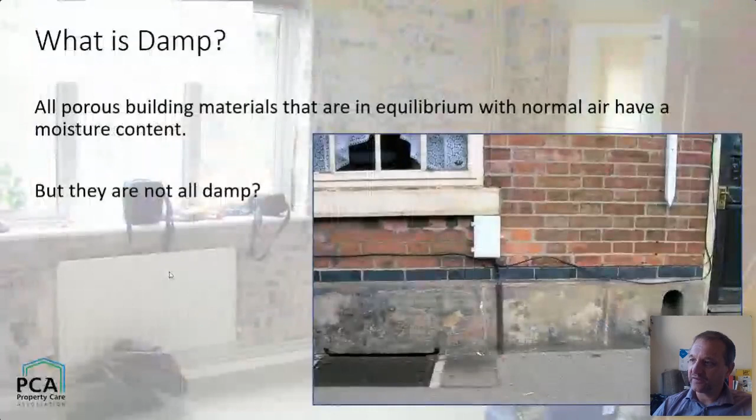So this is not really a presentation about remediation and about remedies. It's much more about how we think of damp and how we recognize it and how we diagnose it. And it's not going to be a step-by-step guide to how to use a moisture meter either. It's going to be a conversation really about dampness and the more broad thoughts around how we manage it. So let's start.

The other thing I've got is a few slides today that don't make me particularly proud. And this is the first one. This is a house in Derby, near where I used to work at the British Pest Control Association. You can see a beautiful slab with a blue brick damp proof course. It's probably a remedial one. And then if you look very carefully, you'll see damp proofing holes above it. And you'll notice that that's about 2.5 foot up from the internal timber floor level. You know it's got a timber floor because there's a cellar underneath it.

These are the things that do not make us proud. And as a responsible preservation industry that's built on skill, built on knowledge, these are the things that have given us a bad reputation, and the sorts of things that we're working very hard to put right. So not stuff we condone.

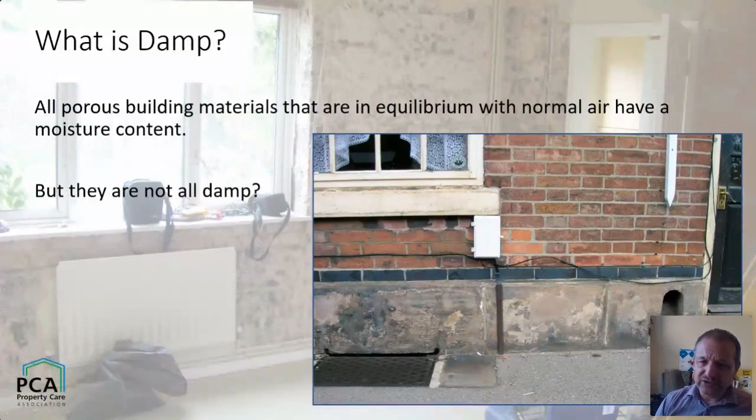So what is damp? Well, all solid construction materials have a moisture content. Some plastics probably don't, but most porous materials gathered from nature and reformed as construction materials, whether it's timber, bricks, even concrete, have a moisture content, and it will be in equilibrium with the moisture in the air and with its environment. So everything has a moisture content, but it's not all damp. So how do we distinguish what's damp? Well, I'm going to read a few bits off slides. I don't do that very often, but solid build materials are only damp when there is an excess of unbonded or free water.

So if you get moisture that enters the building through various sources, we'll look at some of those in a minute, it's only when that water can move around in the structure, when it becomes either a transport mechanism for other things inside the wall. It affects the thermal performance because the air is displaced by water, and the water conducts energy far more efficiently than the air, or when it can act as a medium for the breakdown of stuff.

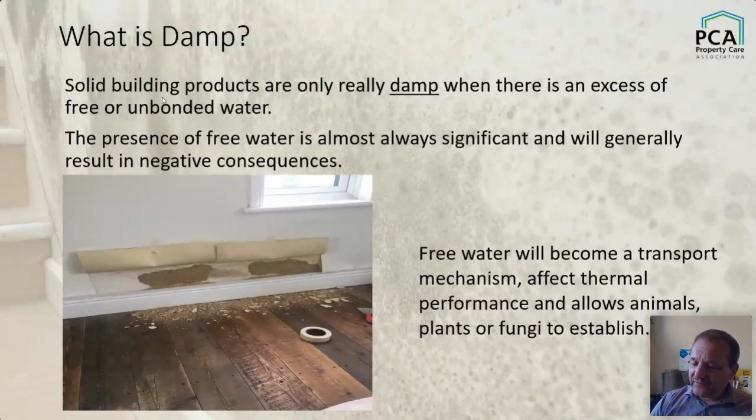So it's where animals and plants and fungi can start to use it to break down materials. They use it, moisture contents go up, and they can eat it essentially. So it's the free water, it's the excess water that is problematic. And so what are the consequences of free or excessive water? Well, we know that timber in contact with damp masonry is susceptible to decay. It absorbs water from the environment, it transfers into the timber, and it rots.

Now, insect infestation. So the photograph shows you a joist. It has decay, it has some wet rot in it. The wall plate has some wet rot in it, but there's also some woodworm, some Anobium in it. And the anobiids need an elevated moisture content to get going. And it allows insects to munch through the sapwood of that piece of pine. It'll also allow mold growth. We talked about the reduction in thermal performance.

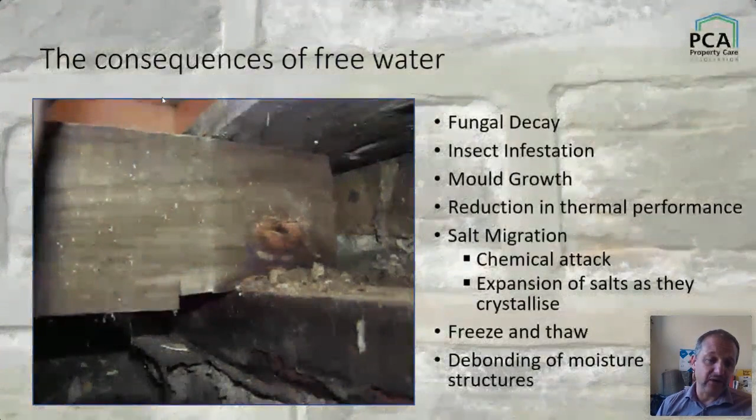The free water will also act as a mechanism to transport salts, and that can break down both timber and masonry structures through a process of chemical attack, but also through the expansion of the salt crystals as they turn from a liquid into a solid, breaking down the surface of the stone. If you can see just in the backwash of this slide, there's a piece of sandstone wall with salts appearing at the surface, in part because it was pointed with sand cement when the wall was very wet, and the salts are now coming out through the stonework.

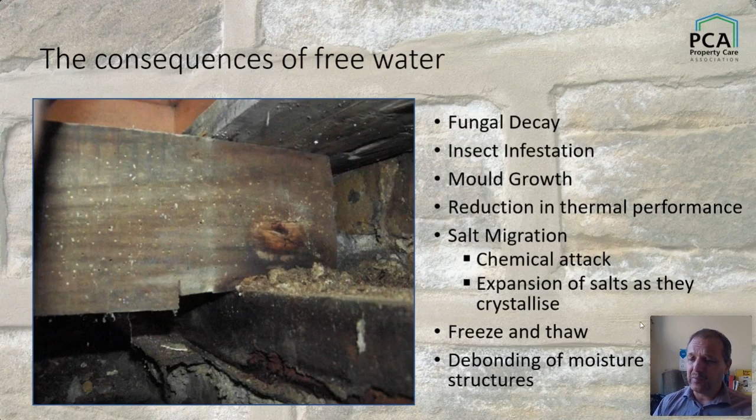High moisture contents in masonry structures also cause freeze thaw in cold climates in the winter, and that's something we're seeing a little bit more of recently as we started to apply insulation to the inside of buildings. It's making the walls colder, and it's causing more freeze thaw problems on buildings where they've had internal wall insulation. One of those odd, unexpected consequences. And we also see, when things get wet, the debonding of structures. So plywoods come apart and other things start to break down.

So where does this water come from? And this is where we make moisture diagnostics really simple. It's very route one, this presentation. It's either water that's outside the building that wants to get through the envelope and get in. So essentially rainwater. Water that has originated from the sky, falls onto the roof, hits the walls, goes into the ground, goes into the drainage system or into the soil, and hopefully drains away. Well, unfortunately, if we build boxes and put them into this damp soil under these wet skies, at some point, if we're not very careful, water tries to get in. And that water, we know, causes problems.

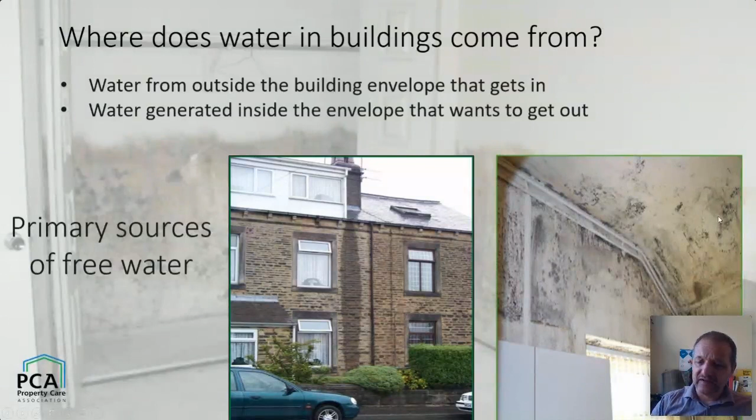The other source of water is the water that's generated inside the building, that essentially wants to get back out again. And the main issue here, and there are a couple of others, we'll look at them in a moment, is atmospheric moisture caused by occupation. So where does the water come from? So these are some of the common defects that we see that are the instigators of lots of issues.

So you've got drainage issues, you've got rainwater goods issues, you've got roof leaks, flooding is something that is big in the news at the moment. All these things cause water to get into the structure and get into the masonry walls where it's held, where it can then move around, where it can cause problems.

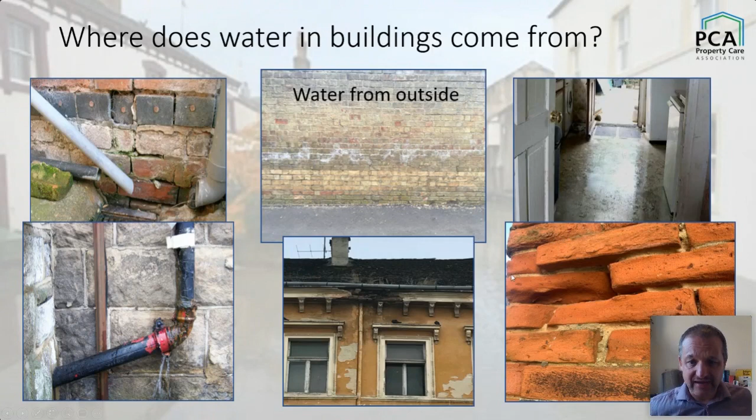Bottom right is a photograph that I took quite recently out on the East Coast. There is a bit of sand and cement pointing on around the corner, but actually most of that isn't caused by poor maintenance. It's actually as a result of really, really exposed conditions and poor selection of building materials by the original builders.

So water from inside, and how does that manifest itself? Well, plumbing leaks are common. They can often go unresolved for a very long time and cause massive problems. We see huge dry rot issues and wet rot issues caused with plumbing leaks. We of course see lots of debonding and damage to finishes as a result of plumbing leaks.

It's often in new buildings where water has been built into the structure and takes a long time for it to come out. And usually for the first 12 to 18 months, if the building hasn't been dried down properly, and particularly when the occupants are moved in quickly after the construction phase is complete, you get a lot of water inside the building that then wants to get out, and it manifests itself in condensation in all sorts of horrible places.

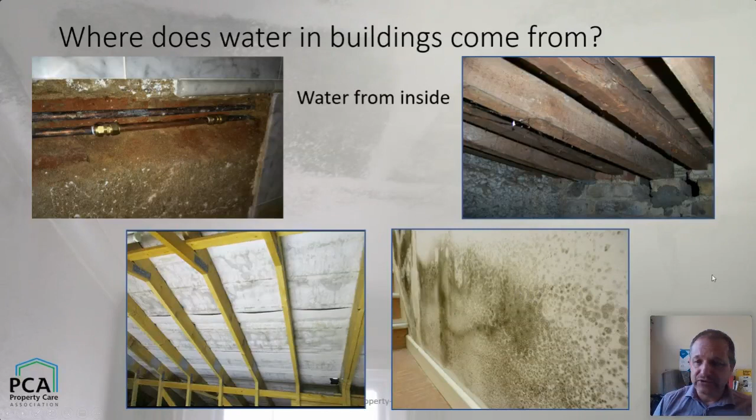And the bottom right hand photograph is a great picture of mold growth; it's basically as a result of internal moisture imbalances. And we're going to talk about internal moisture imbalances a little bit more as we go on.

So a few years ago, we were looking to start a debate with a number of people around getting a research project going. And I was challenged by a guy called Neil May, who unfortunately died a couple of years ago, who founded the UK Centre for Moisture in Buildings. He said, well, why don't you actually think about understanding what is an acceptable level of moisture in buildings?

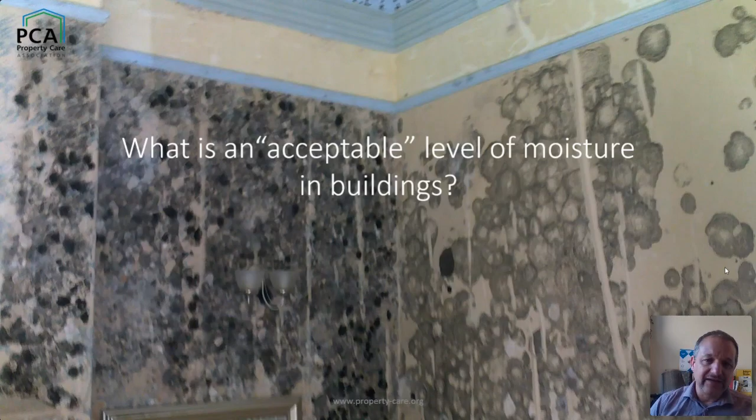There's lots of debate about how moisture is diagnosed, how moisture is then dealt with. The term breathability is one that makes my hair curl and doesn't really mean anything. But there's lots of conversations about these things where people are in disagreement. So why don't you actually concentrate on a project where you understand and define what an acceptable level of moisture is? And so the next few slides are really some of the thoughts that have come from that journey of thought and discovery.

That project converted into a 2.5 year knowledge transfer partnership with University College London, and that has resulted in some quite interesting findings, which I'll pick up on later in this presentation.

So, if there's sufficient water to cause any of these things, so mold growth, conditions for insects, deterioration of finishes, liquid water on the surface, staining, salt damage, timber decay, distorted timbers, all the collapse of structures. By collapse, I don't mean catastrophic collapse every time. I mean things like fiber boards, plaster boards that actually disintegrate because the moisture contents are so high.

All of those things actually define a damp problem. If they are there, there is free water and there is most certainly an issue. If there wasn't, the building would be in equilibrium, these things wouldn't break down. The other thing that's really important, I put it at the bottom, is that dampness makes people fed up.

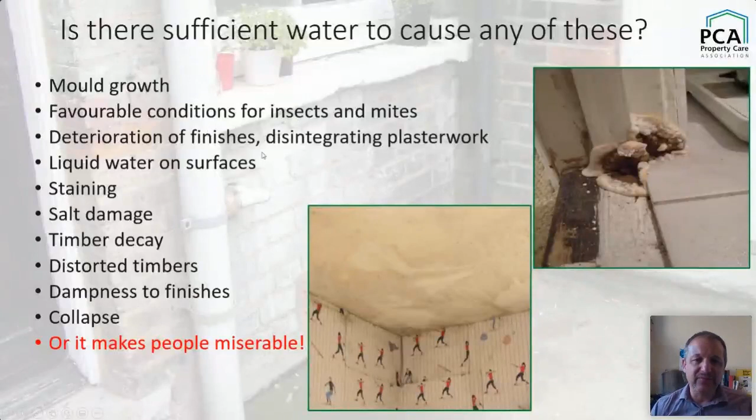It's unpleasant. You don't want it in your house. So if you have distorted or falling off plaster, if you have issues of that nature in the house that you're looking after, that you're the custodian of, that is your pride and joy, that's your biggest investment, and you have something that looks damp, then you don't want it. It makes you unhappy. There's also some suggestions, of course, that it can make you ill too.

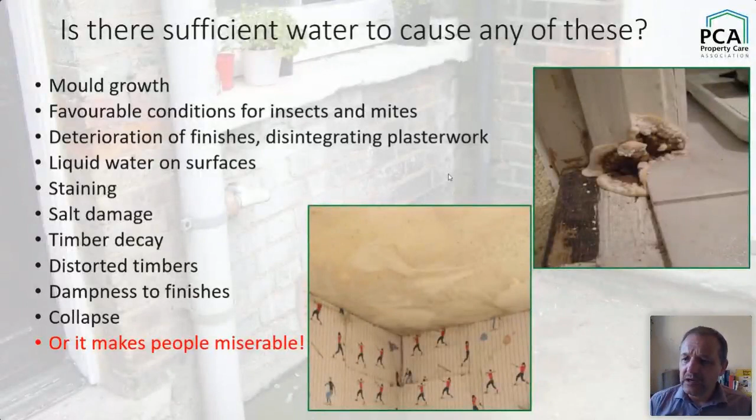And there is a debate about whether the biggest issue is about your mental health and how it makes you feel and how it depresses one, or whether it's actually the effects on your physiology from the dampness itself. We're used to living in relatively damp climates, but actually living in a damp house is just miserable.

So let's move on. So let's think now from a scientific point of view, rather than the visual point of view, what the issues are, or where the critical thresholds for moisture issues might be. And here are three gentlemen that have influenced me over the years. Graham Coleman, a friend and mentor. Chris Coggins, bottom left, who was my ex-boss, but a mycologist and somebody that knew more about dry rot than anybody I've ever met. Brian Ridout, who basically knows a great deal about lots of stuff and has written lots of books. But some of these are taken from their quotes.

Moisture contents of less than 20% provide what is described as immunity from fungal decay. I wouldn't say they were completely immune, but generally timber below 20% moisture content is kind of safe. It won't rot. However, you need to get it below 15% to stop anobiids. Anobiids are woodworms and death watch beetles and the common forms of wood destroying insects that we see in the UK. But that's common for most timber destroying insects too. Things like wood boring weevil and Lyctus, they still like elevated moisture contents as well.

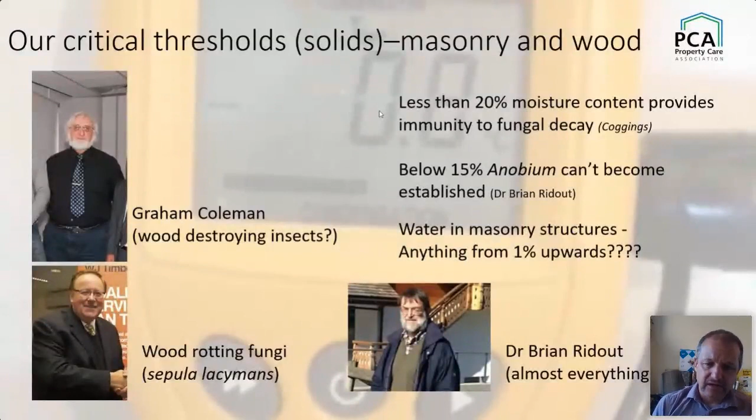But the water in masonry thing is the big question. So there are lots of numbers kicking around about what constitutes damp masonry. But what I've kind of done and looked at on my journey of, if you like, discovery or rediscovery of these subjects is that actually you can have moisture contents of 1% and you get things that are incredibly wet. So how does that work? So let's take a panel of brickwork. It's a section of 4 different types of brickwork there.

The one on the left is a hard blue brick, fire bricks, engineering bricks, whatever you want to call them. The second panel is a type of brickwork that's incredibly familiar to me. It's a section of brickwork from a terraced house in North Leeds. They're Normanton Commons with very thin joints, usually black ash mortar with a white line pointing across the front. Really tight, really well built, really good external skins anyway. The next is a panel of softer brickwork, and the one on the right is a mud brick.

Now, BRE sort of indicate in their guidance in BRE 245 that if you have a moisture content above 5%, you can consider a masonry structure wet. And below 5%, you're probably okay. And there's not very much description in that. However, I would assert that if you had 5% moisture content in the blue brick on the left-hand side, that wall would be saturated. Those bricks are incapable of containing 5% by weight or volume of water because there simply isn't enough room inside the material to get up to 5%.

At 5%, the Normantons, the Leeds bricks, they too would be absolutely saturated. I would say that the next panel at 5%, might even be in equilibrium if there's a bit of salt kicking about. And in the right-hand panel, at 5%, those mud bricks would be dry. So the point I've tried to make in the words underneath is without a reference to density, porosity, and equilibrium moisture content for every product that we look at, how do we really understand the level of wetness that there is in any given construction material?

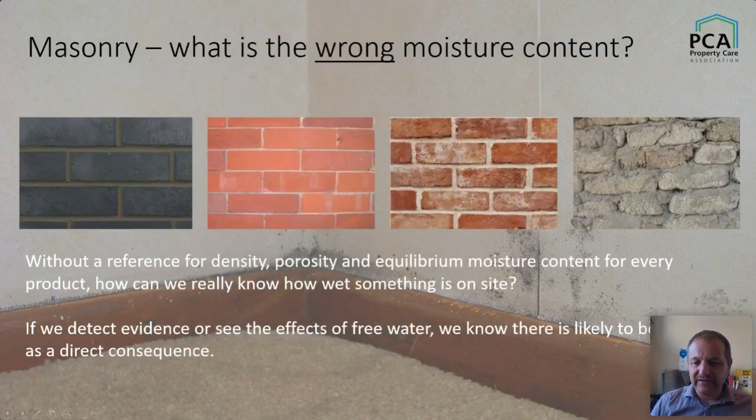And if we detect free water, is that always going to be a problem? How do we detect that free water? How do we know? And that really is the trick of the surveyor, if you like. Now, here's a slide of a selection of moisture metering things that I have found kicking around the office and stuck on a table to take a photograph of. The question is, are they any good? Well, lots of people will be screaming at the screen saying some of those are for atmospheric moisture, and they are much more scientific than the conductivity meters, and there's 3 or 4 of them sat in that photo that do some sort of conductivity metering and capacitance metering.

Are they any good? Do they give you an indication of what? No. Do they tell you the moisture content of samples? Well, to be fair, in timber, they're not bad. They're relatively accurate. They're within 1 or 2 percentage points. But in masonry, they can't possibly tell you the amount of free water that's available in a sample.

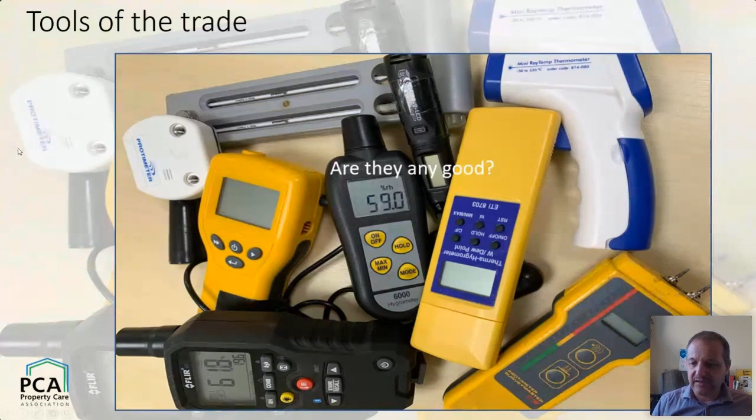Question is, does it matter? Does it really matter that you know? Because what you are trying to do in using these instruments is understand where there are anomalies, where there are changes. So if you're using one of these pieces of kit on the right-hand side, or the left-hand side, for example, the capacitance meter on an old MMS meter, and it's giving you a reading of 1,000.

Now, we don't know what 1,000 is. We don't know what they are reading a number of thousands. It's just an arbitrary measurement. But if you've been sweeping across the wall and it's been saying it's 250, and all of a sudden you find a bit that says 1,000, that gives you a really strong guide to where to look, to start using your brain, your instincts as a surveyor, your skills, to understand why you've got that anomaly.

The moisture meter is a great guide, and the conductivity meter is a fantastic instrument at telling you when something is dry. It's lousy in masonry for telling you how wet it is, but it's great for telling you that things are actually not worth worrying about, and great, again, for giving you an indication.

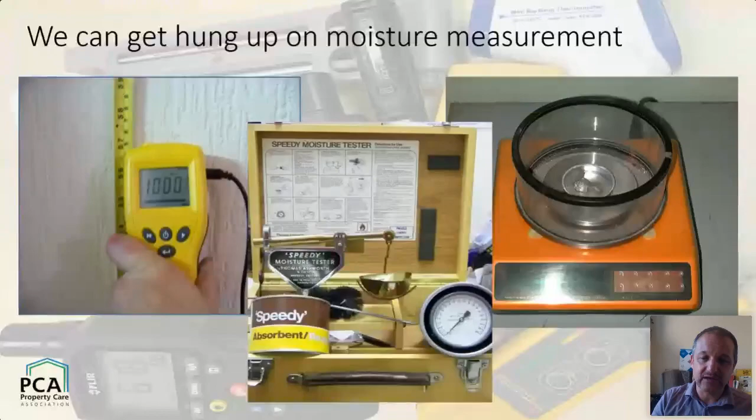Now, I'm going to bring it right back to the simple stuff again. So, the determination of a damp problem. For me, it's as simple as this. Is what you're looking at causing a problem? If it's causing a problem, then it is a problem, and it needs measures to reduce, prevent or eliminate that problem. Is what you're seeing likely to cause a problem? Does it have the potential to cause harm? If it does, then engineering solutions or remediation is necessary to prevent further deterioration, to prevent problems from happening.

And the third thing, which is just as important, is it a problem for the occupant? Because if it is a problem for the occupant, even though there is some debate, and I agree with the debate, about historic buildings and whether some have a degree of free water and always have had from the point they were constructed, and they manage that and work with it well. It's probably been damp from 3 years after it was built in 1750.

But a new owner comes in and they want to turn that room into a dry, habitable, lovely place, then they are going to do that. And it's our job not to tell them you've got to live with dampness, but to work with them to deliver a sympathetic, less harmful solution to that damp problem.

It is no good for us to take the moral high ground and say, you can't do that to your home, because they will anyway. Now, one of the photographs here, I pinched this from Damp Sam. I don't know whether you're on Damp Sam, but you'll recognize your own photograph if it is.

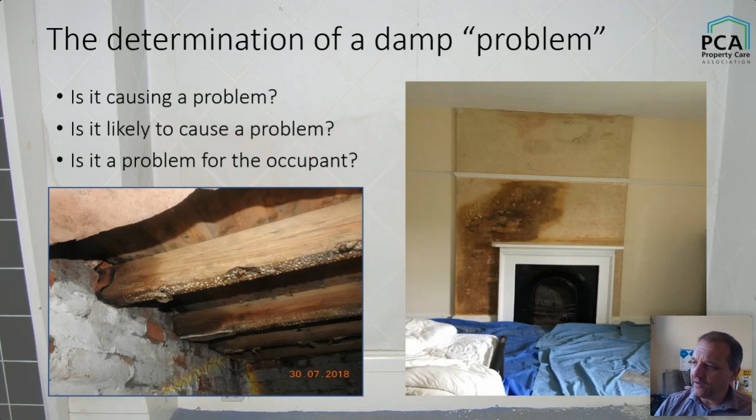And again, this presentation is not necessarily about remediation, but it was worthwhile just picking up on that photograph and saying, what do you do? How do you think about the remedies there? And actually, it's a good illustration that it doesn't matter which way you go to recommend remediation, there will always be an alternative view. So, knowing the precise moisture content of a solid material, is it always critical? No. In my view, it isn't.

Actually, understanding the mechanisms by which that water got there, and having the skill, the knowledge, the expertise, and being bothered to find out how that water got there, understanding what mechanisms are at play, what's at risk, is far, far, far more important to me than establishing the exact volume of water in any particular sample. Just understanding that there is something going wrong, that there is a process that can be followed back and then understood and rectified and remedied. I don't think that in the vast majority of cases where we discover dampness or the risk of dampness, understanding precise moisture content is necessary.

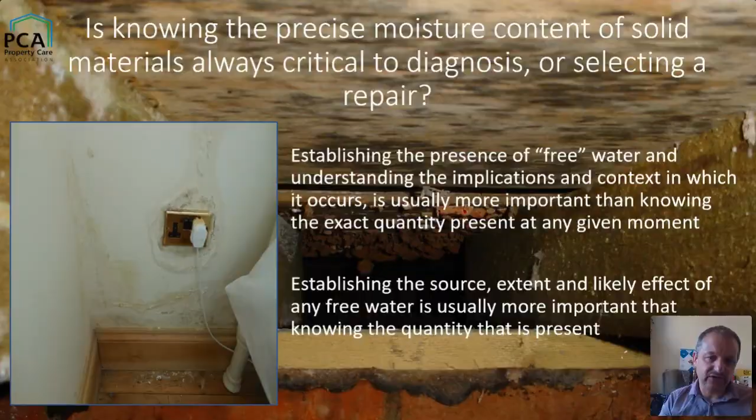This brings us then back onto the use of those pieces of equipment that are derided by quite a lot of people. You know, they don't give you a precise reading, so what? What they've done is allow you to identify the scope and the extent, find it in the first place often, and then act to understand it further. As I say, it's far more important to understand its presence and the process than it is to understand the precise moisture content. There are some exceptions.

When you're drying a building down, and these are a couple of photographs taken after the floods in Hull a couple of years ago, when a friend and colleague of mine, Dave Cook, invited me along to have a look at some properties that had been devastated by the floods that affected Humberside,

No, it wasn't Humberside. He'll kick me for that.

East Yorkshire and Lincolnshire, 10 years or so ago. It's very important when you're drying stuff out post flood or post water leak sometimes to understand precisely what the moisture contents are. And that is because you're going to reinstate.

And if you're going to reinstate with stuff that is sensitive to moisture, that can be compromised by applying it to walls that aren't thoroughly dry, then you've got an issue. It's also important to understand precise moisture content when you're scheduling replacement of moisture sensitive elements, such as timbers and this sort of stuff. It's also particularly important where you're going to create closed voids.

So areas behind timber frames, for example, you want to know that actually you've got a relatively dry environment behind there, because if you enclose it and you get this issue with cycling of water with heating and cooling, then that can be a problem, because that liberates free water in a way that can be used then for biodegradation of vulnerable structures.

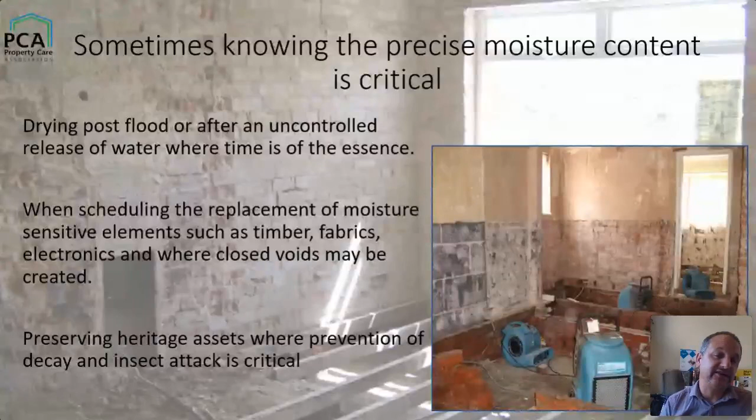And where it's also incredibly important is when you're looking at preserving heritage assets. So curating buildings and ensuring that they're there for future generations, a real detailed understanding of moisture contents and an ongoing understanding of the changes in those moisture contents can be absolutely critical to prevent fungal decay and insect attack and the degradation of buildings.

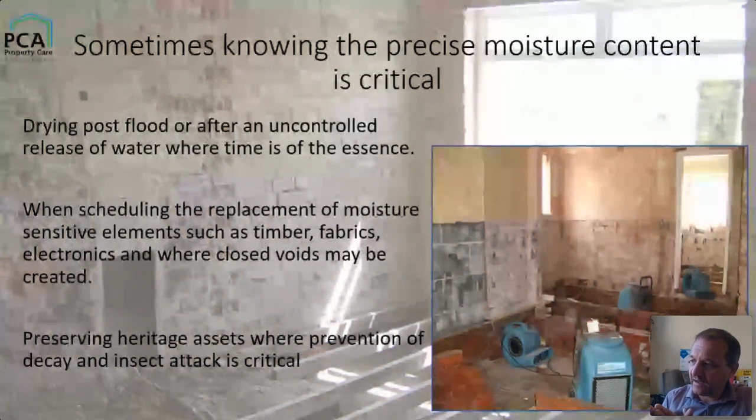It's also very, very useful when you're working on your maintenance elements. So if you detect spikes in moisture content, you can act on that very quickly before it causes harm. So it's not to say that understanding the detail of moisture content is never important. What I'm trying to impress on you is that actually in the more normal domestic realms of damp diagnostics and understanding buildings, it's very uncommon for you to absolutely need to know the moisture content.

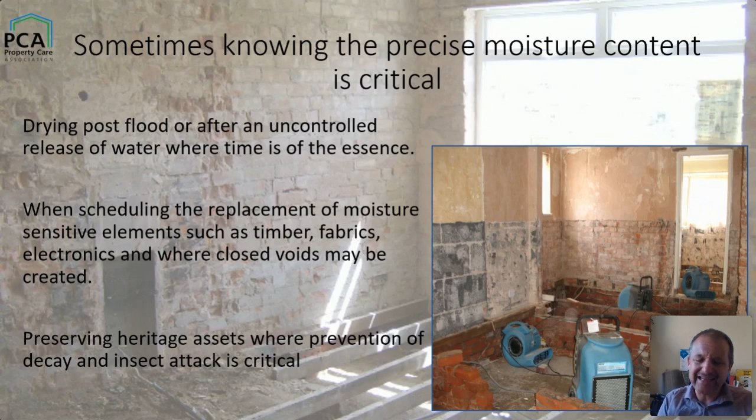And even if you do, you need then to be able to understand what you've learned. Now, I'm conscious of the time, so I'm going to keep cracking on. Now, let's leave masonry and solid building materials behind, and let's look for a few minutes at the critical thresholds for atmospheric moisture.

Again, some of the people that I absolutely look up to in respect to this field of science and construction understanding. Graham, again, who inspired me and others to look at this and has taught and mentored a lot of us and still provides training at the PCA now on both dampness in buildings and on condensation. Dr. Fernando, who is now a fellow of University in Chile, and my friend and colleague Paula, who is currently employed by the PCA as our material scientist and is working on atmospheric moisture.

In fact, she's at the moment probably scratching away, putting another bid in for funding to do a research project on... what's it on this time? Atmospheric pollutants, and where we've done a lot of work around moisture, it fits quite nicely. So we've spent a long time looking at atmospheric moisture in great detail, all funded, I have to say, by PCA members and the funds they generate.

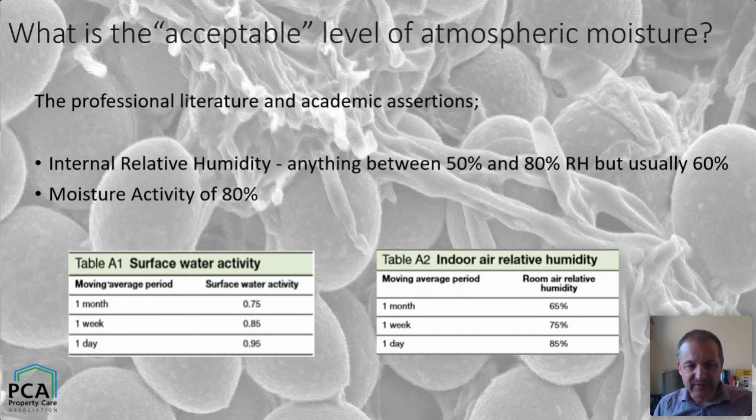And that's important because that's the bit that defines the point at which mold can grow. So it is slightly higher, but essentially we have these two numbers. So moisture activity at 80%, RH at 60, and even at 80%, quite a lot of molds will grow quite happily, but they take a while to kick off.

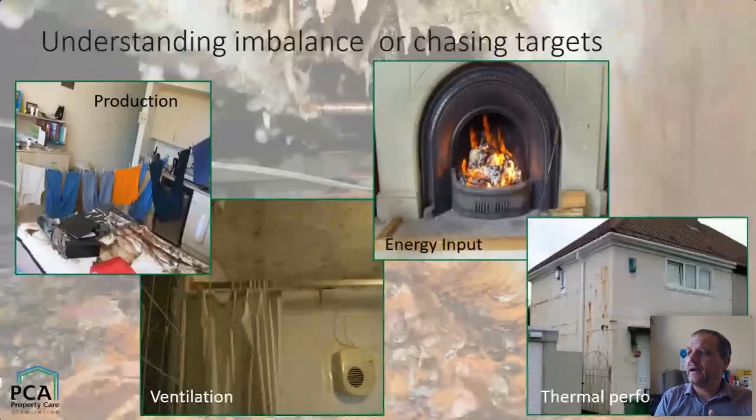So we then move on to trying to understand imbalance in buildings, and we understand that relative humidity and indoor air moisture content is a balance. It's a balance between the amount of moisture that's produced, the ventilation that's provided to the building, so its ability to exchange that damp air with usually cooler, drier air from outside. It's about energy input and how much heat you put in, because relative humidity is absolutely related to temperature.

And it's all about the thermal performance of the building. And yes, that is a fan unit installed inside a shower unit above a bath. Probably the worst installation I've ever seen.

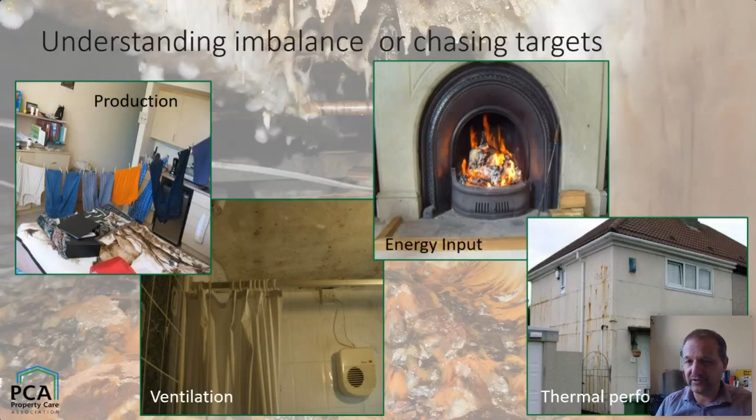And the house on the right is a great photograph showing thermal performance. It's a tin house. It's basically a steel framed house with a steel external cladding. It's got Terraline sprayed on it, but yes, that is rust leaking out of the house. And the photograph in the background is a fantastic photograph of dry rot that was sent to me last year by Adrian Dawson. So thank you, Adi, for that.

Now, what we have looked at extensively for the last few years is what we should be looking at to understand imbalance and moisture imbalance in buildings. What are the causes of moisture, of mold? What are the things that have put a building out of balance? And what we've recognized, and what we've been able to work around, is that actually all of those four elements that we talked about on the previous slide, if any one of them slips too far out of balance, then the other three can't make it up.

And actually what you can often do is have very small amounts of alteration, very small amounts of manipulation on either the heat, the ventilation, the amount of production, etc. And actually it brings it back into balance. And so we've, over the last, as I say, a couple of years, done a lot of research into this.

We've now got to the point where we've done our proof of concept, and we are in the process of developing, and that will hopefully be available for PCA members and other surveyors, a diagnostic tool that can be left in a property for a couple of weeks. It's not something that can be done instantly in a snapshot, but then we'll understand what's going on in that building. It will actually quantify and diagnose imbalance, and it will also direct rectification works in a scientific way that will bring that property back into balance and therefore prevent or massively reduce the chances of future mold growth.

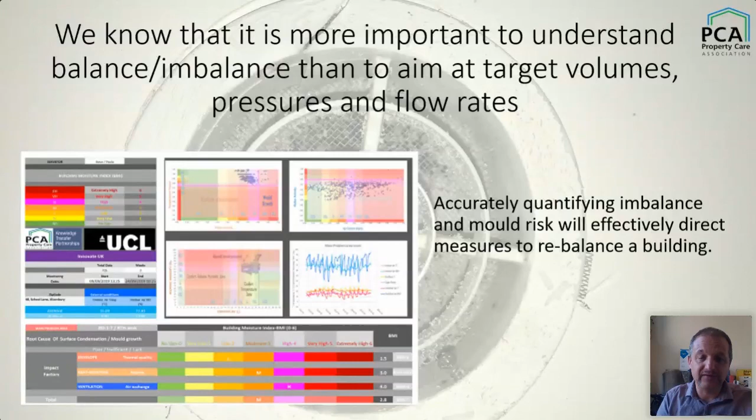So the science of diagnosing atmospheric moisture is far more about understanding in detail rather than, as it is in masonry, seeing a problem and then trying to understand the mechanism. You know what the mechanism is with mold. What's tricky is actually recognizing and quantifying the amount of imbalance that's taken place, understanding why that imbalance is there, and then providing the solutions.

So really, to conclude that section, moisture management is as difficult and complicated as we want to make it. It can be very complicated, and it's a science, it's an art, it's something that has intrigued me all of my career, and I don't feel as though I know the half of it. There's a huge amount still to understand, but the basic principles are straightforward. We can spend a long time establishing moisture contents in buildings that we then pretend to understand, but that actually don't get us any further forward.

A client, a homeowner, generally doesn't care how much moisture there is. What they care about is how they rectify and fix it, how they don't have a problem, and how they live a quiet and happy life. A detailed knowledge of construction is priceless if you're doing dampness diagnostics, because you have to understand those mechanisms, how things interrelate and link together and how moisture moves through structures.

In my experience, the best surveyors are tenacious, they're interested, and they like what they're doing. They want to lift the board, they want to look behind, they want to get into things. The other thing that I think is important to point out is that moisture diagnostics are not always possible in one hit. They can be a staged process. You can have more than one thing happening at once. And so sometimes to understand that, you have to unravel it, and that may well take time. And that brings us on to the fact that there may often be more than one fix. And so thinking about all of the things all at once sometimes doesn't work, sometimes it does.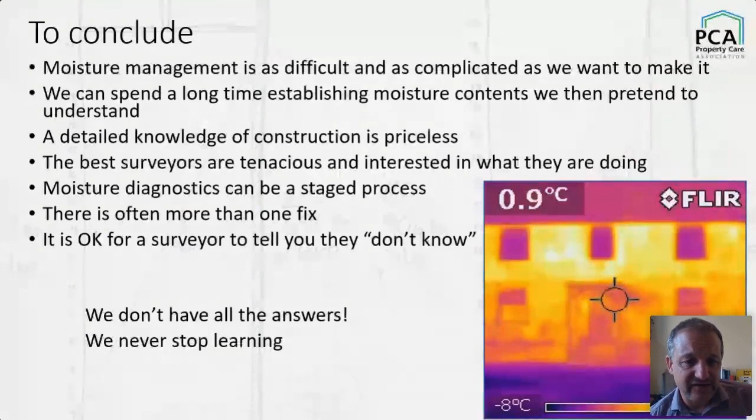And in my opinion, it's very important that we as an industry, and we're talking about the specialist preservation sector, but actually as surveyors, can say sometimes that we don't know, and that we know why we don't know, and that there's an opportunity to do further diagnostics, to do further opening up, so we do know, but don't guess. That leads to problems and bad reputations and issues. And it's good to say that, and admit we don't have all the answers, but we never stop learning.

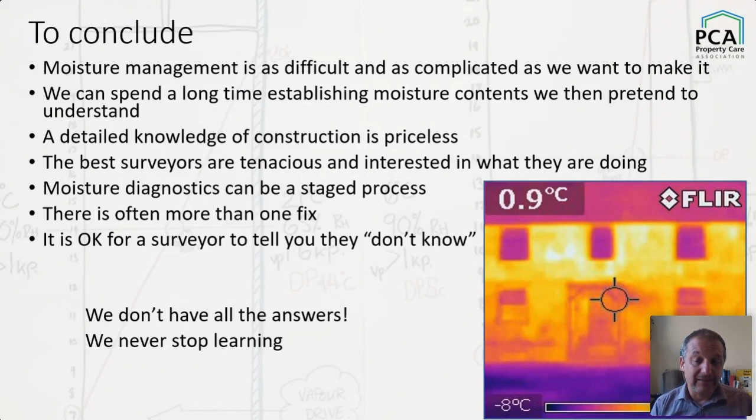Now, I know that some of the people wanted to know a little bit about the methodology that we have put together in partnership with Historic England and with the Royal Institution of Chartered Surveyors. Here's a document. There's a link to it underneath. I'll talk about it very, very quickly. There is a caveat on the front that says it's a draft document. The current document on our website is not a draft document. It is finished. The only reason it has draft on it is because we would have to take the RICS's logo off if we take the caveat off.

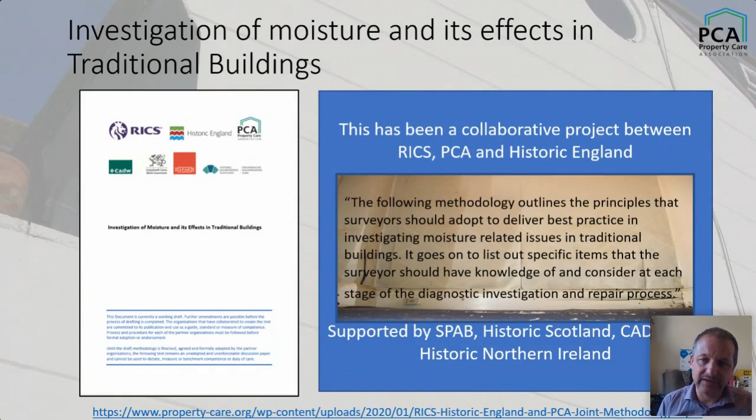RICS have a lot of work to do, and they realize that they move quite slowly, great organization, but they realize that if they totally endorse it, then their surveyors will be measured against this quite quickly, and their solicitors, quite rightly, are quite nervous about it. So for now, that caveat sits at the bottom of the document and says that we're all happy with it, but actually we're not completely aligned with it yet. And so read the document for what it is.

Now the document is reasonably easily set out. Here's a picture of some rising damp. I know the source of moisture. Nice picture, but there you go. So one of the things that the new methodology talks about is understanding context, and it's something that we've been really quite thoughtful about. Context is not just about how the building sits in the street or how the architecture sits in the environment. It's about the little things too. It's about a skirting board or a dado rail, or it's about the way that the building is put together, the history of the building. And actually, it's a good thing that we're now thinking about the context of some of that stuff.

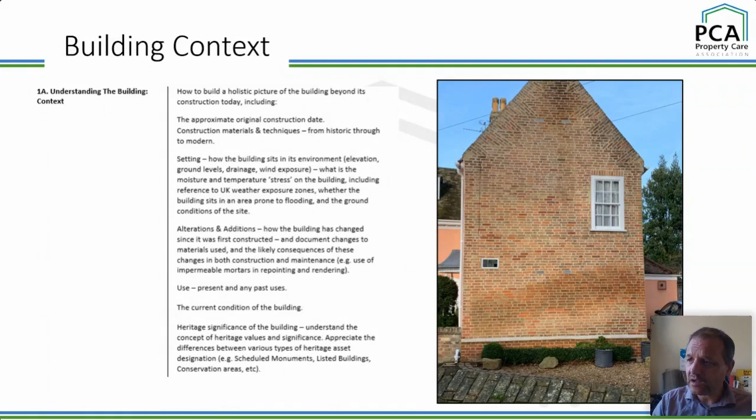What you will notice if you download and read the document is it doesn't talk about silly things like breathability. It talks about wetting and drying. It talks about understanding the material's ability to get wet and dry out. It talks about cycling water. It talks about good surveying practice. It talks about a thoughtful and considered route to remediation. All things that the association has condoned and supports and has always supported. But it's great that we've now got this document that is a shared document between those three organizations. We've all come together. We've all stood behind it.

So what are we doing with it? The association is now working to be compliant, and we're committed to the adoption of the methodology over the next 12 months. The COVID-19 thing has certainly thrown a few spanners in a few works, but we're still basically working to become aligned with all our members to this methodology by the end of the year. Since publication, a whole bunch of other people have come out and said that they support the principle of the document, and they're very, very welcome to support it. What we do hope is that they will all use it as their procurement standard as well.

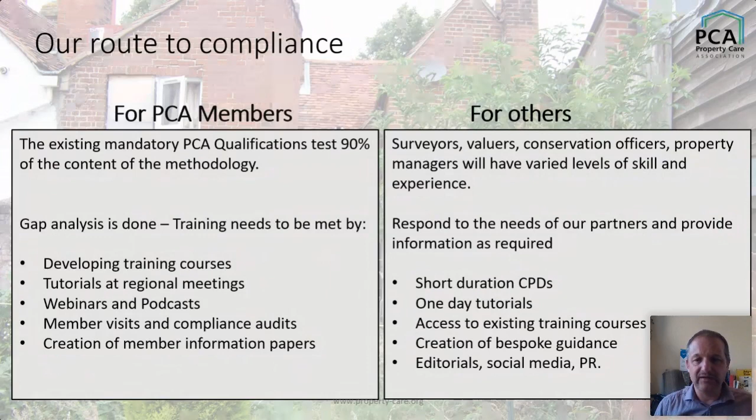So what we're doing at the association for our members is we're developing courses, we've got tutorials and webinars. We're doing stuff at compliance audits, and all our members are audited at least twice a year. We communicate with them weekly, so we have a good open line of communication to promote the methodology. We don't have very much to do to change either our association qualifications or training, because actually they're very, very broadly aligned anyway. But there are certain things to do.

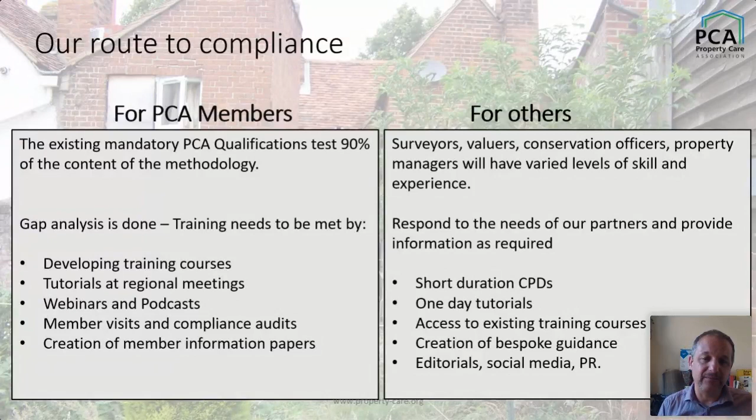And what we're doing for others and other interested parties is things like this. So we've got some short duration CPDs planned. We've got some tutorials. I've got some guest speeches, some lectures that were planned. Don't know whether they're going to happen in the autumn or not. But we're also going to provide some guidance and some other stuff as well through the year. So watch this space for that.